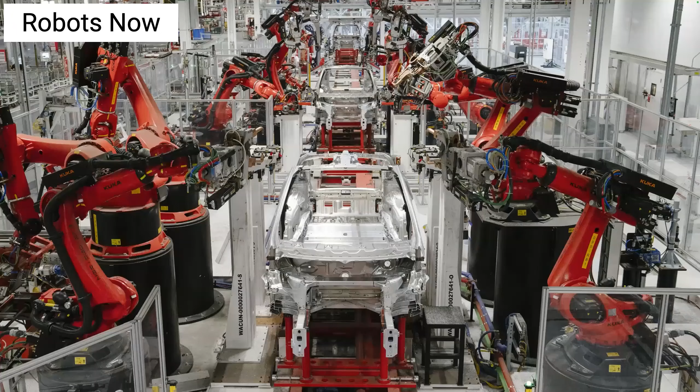So let's start by taking a look at how robots are being used now. They're typically only used in very controlled environments such as factories, and they're programmed to execute the same precise movements repeatedly, for example for an assembly task. These robots don't need to interact with humans at all, or need to find a way to deal with the messy real world that lies outside of this factory environment.

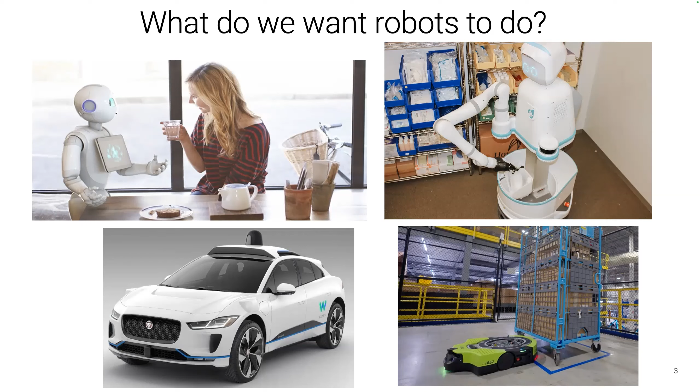But instead, the robots that we're all envisioning and hoping to bring to life are ones that can work in these complex real-world environments. Some applications include home assistant robots, healthcare robotics, or autonomous vehicles, just to name a few. Developing these robots is challenging since, instead of working in controlled environments like factories, they have to work in dynamic human-centered environments, and might also need to interact with humans themselves. This makes it very difficult to program these robots to work for every possible scenario, especially when the environment itself is so complex and unpredictable.

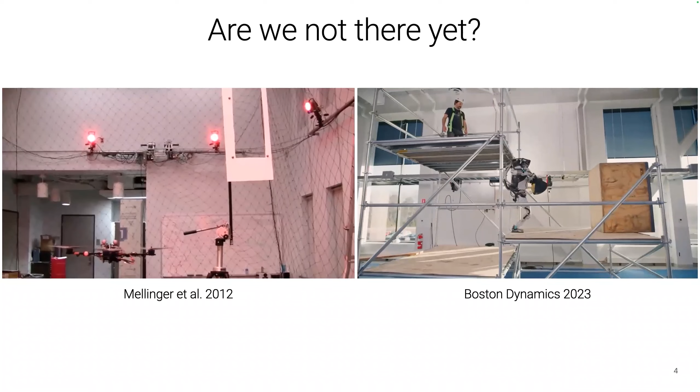So are we not there yet? We've seen many videos of robot successes through the years. From 2012, we had quadcopters navigating through tight spaces. More recently, we have videos from Boston Dynamics where their robots are doing parkour, jumping and flipping and interacting with their environment.

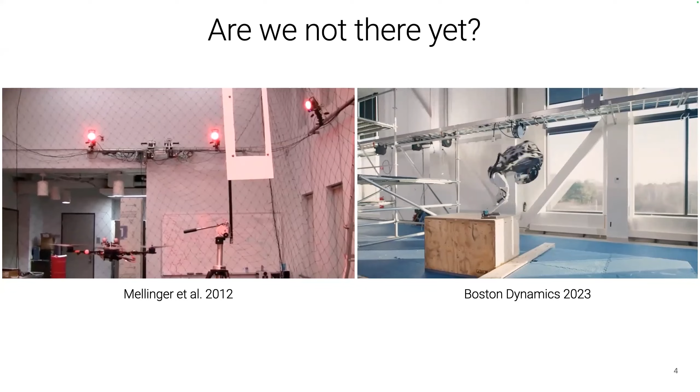However, I would argue that we're still not there. What these videos don't show us is a team of control engineers that make this possible. Designing these controllers is often very time-consuming and difficult to do. And despite taking the time to hand-design these controllers, they can still fail when faced with corner cases in the real world that were not properly accounted for.

So instead, many have turned towards learning-based approaches as an alternative to handcrafting robot controllers. Some popular techniques include imitation learning and reinforcement learning, and both of these have shown impressive results. Today I'll focus on reinforcement learning.

Deep reinforcement learning is a very powerful method, but it is also very data hungry. And robot data in the real world is often very time-consuming and difficult to collect. So others have turned towards using simulators as a solution.

Simulators allow us to study complex tasks such as locomotion, rearrangement, navigation, and also manipulation. The benefits of simulators are that it's safe, allowing researchers to study corner cases that might be challenging to recreate without damaging or causing wear and tear to the robotic platforms. Simulators are also fast and scalable, running orders of magnitude faster than real time and parallelized over a cluster, enabling decades of experience to be collected in days.

Simulators also enable fair comparison and benchmarking. With the AI community running challenge competitions, they're able to evaluate models in identical settings, leading to more reproducible results. Simulators are cheap and lower the barrier to entry, especially for those who don't have access to real hardware. And simulators are also diverse, supporting a variety of tasks and data sets, allowing researchers to train and test in different scenarios.

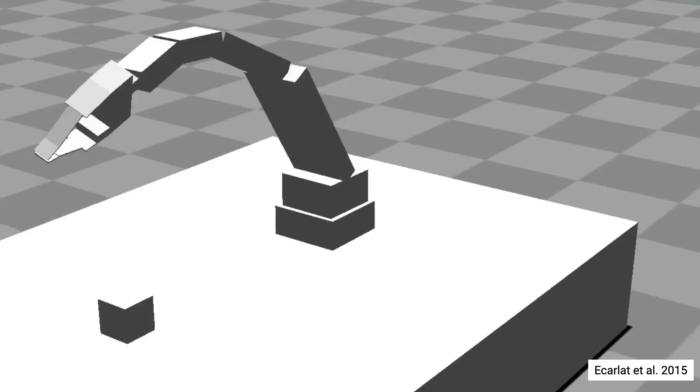In a different scenario, researchers wanted to explore the possible interactions between this robot arm and the cube on the table. So they purposely closed or disabled the gripper, wanting to investigate the different ways that this robot arm could push this block around the table. But what the algorithm found was that if you hit the box with the gripper in just the right ways, you can actually force the gripper to open and hold the box. So this effectively cheats by re-enabling the disabled gripper.

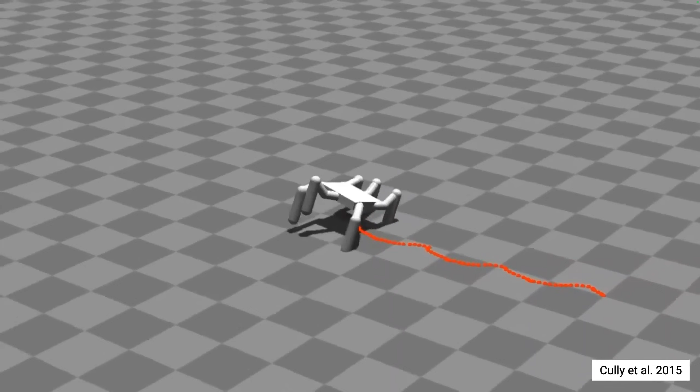In one more example, the authors wanted to experiment with learning a locomotion controller that would be robust to, for example, damaged legs. They wanted their controller to walk in the setting where one leg is damaged, and slowly increased the number of damaged legs. Here we see the case with 3 damaged legs, and the robot is still able to walk.

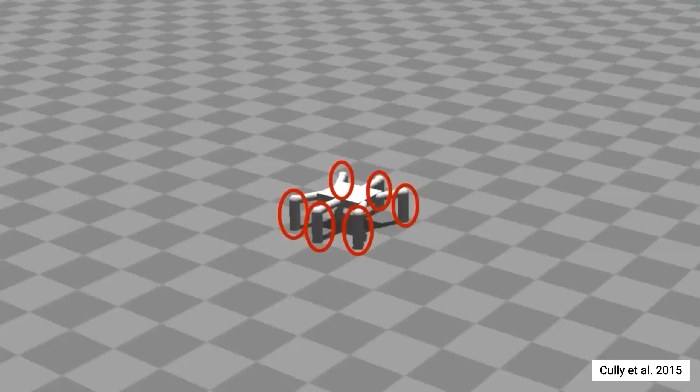For the sake of completeness, they tried all 6, expecting this to fail. But what they saw was that their algorithm learned to topple their robot over, so that their robot ended up walking on its elbows. This agent was able to cheat by walking on the robot's elbows.

I've only shown a couple examples, but there are many more instances of this happening. In fact, there was a researcher from DeepMind that compiled a master list of all the times that AI systems have cheated and undermined the researcher's original intent in the experiment when accomplishing its given task.

This brings about the question: how can we train robots in imperfect simulators while ensuring that the learned skills generalize to the real world? Today I'll argue that simulators need not be perfect. They don't need to model everything about the world, only what's necessary for generalization.

Specifically, I'll show generalization across, one, novel environments that are in distribution, such as training robots in simulated indoor environments and translating them to novel real-world indoor environments. What's important here for generalization is sim-to-real predictivity - simulators should be optimized to predict how well models will perform in the real world. Also important is closing the sim-to-real gap, adapting the visual and dynamics for both the simulator to match the real world, and generalizing to novel environments that are out of distribution, such as training in simulated indoor environments and translating them to novel real world and outdoor environments.

What's important is environmental or context hints - information that we have about the environment that us as humans can get freely, we should provide these to our robots as well to enable this generalization.

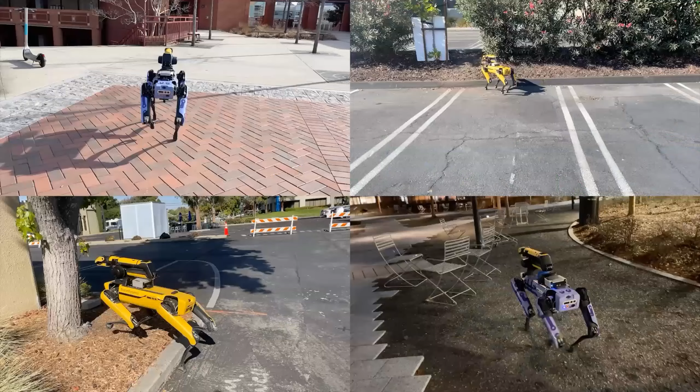So lastly, I'll talk about how we can build on these advancements from indoor visual navigation and leverage simulators to enable sim-to-real out of lab environments and into the wild. Our approach is called indoor sim to outdoor real, and this enables a quadrupedal robot to successfully navigate hundreds of meters in novel outdoor environments around previously unseen obstacles such as bushes, slope grounds, and cars. This work leverages advancements made in indoor visual navigation, where we train the robot solely in simulated indoor environments using short-range trajectories, and we zero-shot transfer to the outdoors for long-range navigation using the Spot robot.

Taking a step back, there's been a long history of outdoor navigation for both wheeled robots, autonomous vehicles, and legged robots, and these approaches have all demonstrated successful long-range outdoor navigation. However, these prior works typically leverage large offline datasets collected through hours of human teleoperation, or they rely on classical planning methods that leverage accurately pre-computed maps, or they leverage waypoints from map services such as Google Maps. In contrast, our work leverages approximate or inaccurate maps. Our method is learned entirely in simulation and transfers to the real world zero shot, and we use no real world experience, either indoor or outdoor.

Again, we focus on the task of point goal navigation, and we train our policy using the habitat simulator. We use large scale datasets of photorealistic 3D scans of indoor environments, specifically the HM3D and iGibson datasets. We first train a navigation policy that operates solely using the GPS and compass sensor, which is used to calculate a goal vector, and then also the depth observations. In simulation, we find that these policies are able to navigate short ranges to successfully reach the goal.

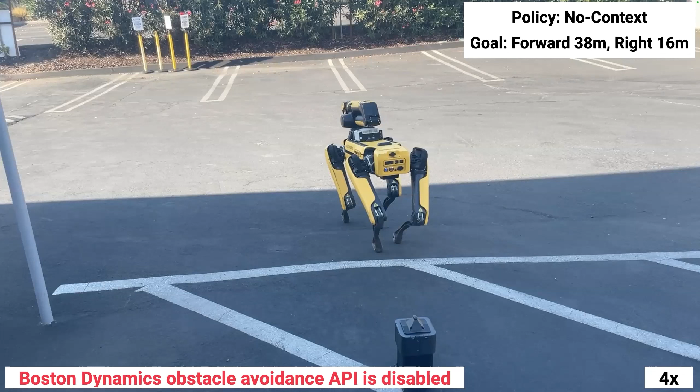So we first wanted to see what would happen if we were to directly transfer this policy to the real robot. We call this policy the no context policy, and we task the robot with navigating 38 meters forward and 16 meters to the right. Since the goal vector indicates that the goal is towards the right, the robot starts walking towards the right and makes a beeline towards the goal. However, this results in the policy getting stuck around obstacles, and it ends up failing the episode.

So therefore, to enable this long-range navigation, we want to leverage additional context information such as satellite maps that are freely available outdoors through public map services to enable long-range navigation. And we provide the policy with this context in the form of a rough sketch of a map by a human. In our work, we call these maps context maps.

Context maps are an occupancy map with white representing free space and black representing obstacles. If we were to overlay these context maps on top of the satellite image, we see that these maps are inaccurate and outdated. For an example, the context map is missing large portions of the building or details such as cars, peoples, and bushes. But crucially, this map conveys a hint for the path to the goal.

So we train a policy to utilize additional context input, and this context can be in the form of this map or ground truth trajectory or ground truth waypoints for the robot to follow. These context inputs are encoded into context features, and we compute the scaled dot product attention between the depth and context features. These attended features are then passed into a second GRU, and note that we're not running any planning algorithms on the map. They're simply being fed in as an additional learned input to a learned policy. So we train this policy entirely in simulation using ground truth maps that we get for free from simulated indoor environments.

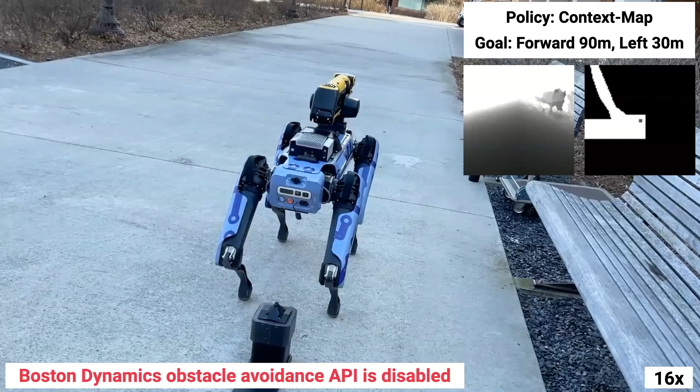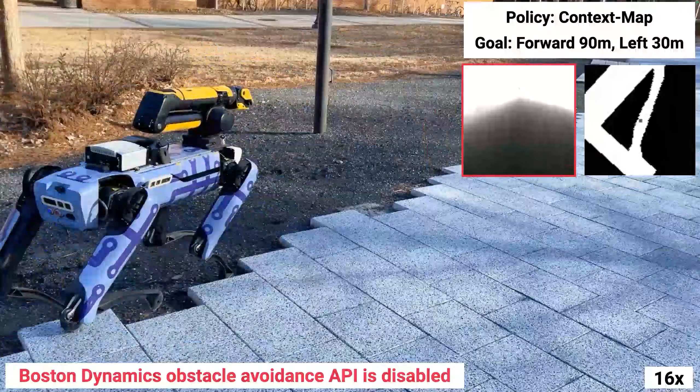And we test zero-shot sim-to-real indoor to outdoor transfer for our context map policies. This robot has access to an ego motion sensor, the depth observations from Spot's front cameras, and the inaccurate context map. In all tests, the Boston Dynamics obstacle avoidance API is disabled. And here we're tasking the robot with navigating to a long-range goal outdoors with many real-world obstacles present, such as bushes, tables, chairs, and pedestrians.

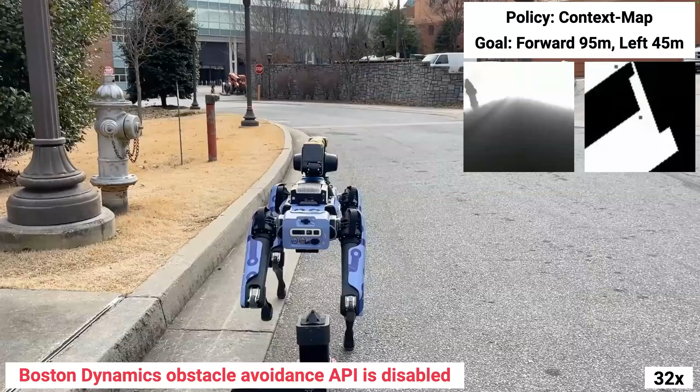And we find that the robot is able to reach the goal successfully. The policy is able to leverage the context maps to bias its search during outdoor navigation, and it's able to reach the distant goal location 100% of the time without a single collision or human intervention.

And we also find that the robot learns to use these inaccurate maps in conjunction with observations from its onboard cameras to adapt to the on-the-ground reality. So it's able to avoid obstacles that are not drawn on the map, such as bushes, chairs, people, and it's able to navigate in various terrains, including dirt slopes and grass.

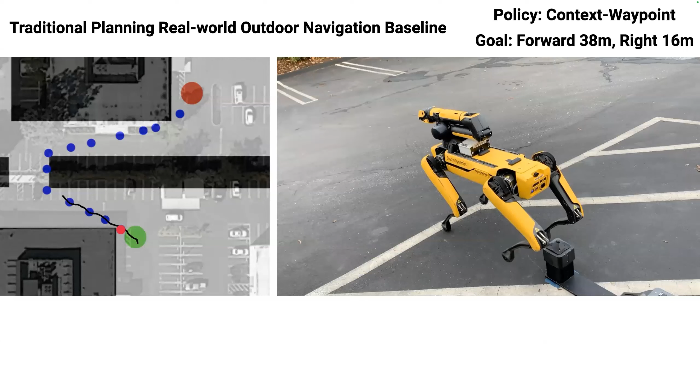We also investigate applying traditional planning methods directly on these outdated context maps as a baseline. So we run A-star on this inaccurate context map to extract waypoints to the goal. And again, this is the exact same map that was used for our context map policy that was able to successfully reach that distant goal. So these waypoints are directly used with the context waypoint policy, which was trained in simulation to follow waypoints to the goal. And we see that this policy is able to successfully navigate to each successive waypoint.

But because the waypoints were generated from an outdated map, the robot ended up missing the actual opening in the bushes. And this confirms our conjecture that these classical planning-based approaches are highly sensitive to the map input, and they're not able to adapt to the gross inaccuracies present in the maps. So in the real world, creating a perfect, complete, and always up-to-date map is not realistic. And therefore, we see that traditional planning methods on these outdated maps ends up failing the episode.